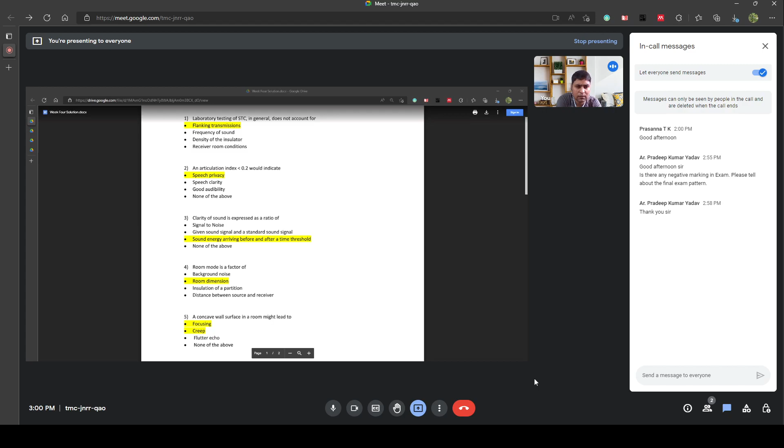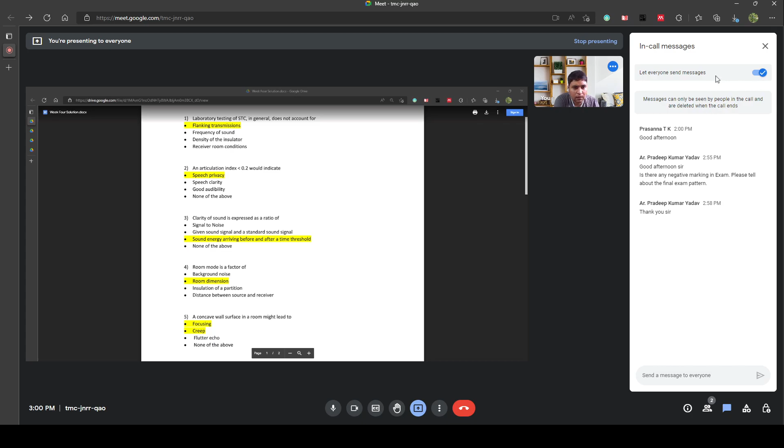And other than that, in today's session we covered again an overview of the whole subject from starting till the end. You can always refer back to the previous 4 doubt clearing sessions that have been conducted. And apart from it, there were some doubts related to the exam in terms of what is the time duration, which is standard 3 hours, and this exam will happen in online mode, as you know.

And also it will cover all the concepts of solar geometry, comfort, thermal adaptation, heat transfer, properties of opaque materials, and also glazing, shading devices, sound and sound defects, how to find reverberation time, and other concepts related to sound.

And finally, lighting, which will cover mostly daylighting concepts, the concept of luminance, luminous intensity, luminous flux, all these will be covered. And all the best for the exams.

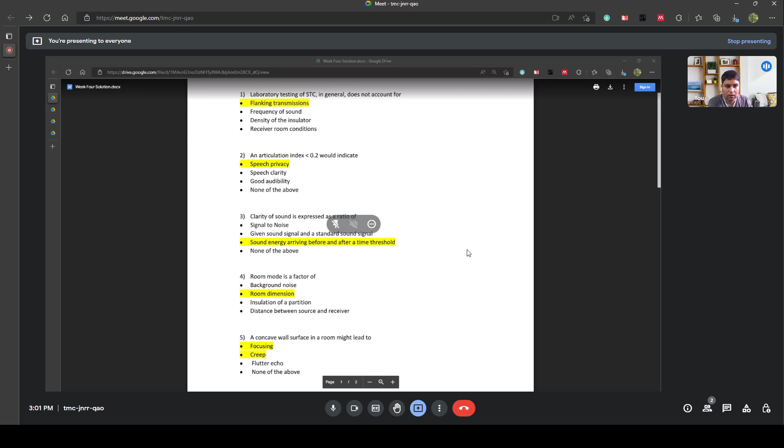Maybe I'll also share the combined presentation. I'll just give again a run through of the presentation, especially for the people who are not able to attend this revision session. In this revision session, we just look back into the whole subject.

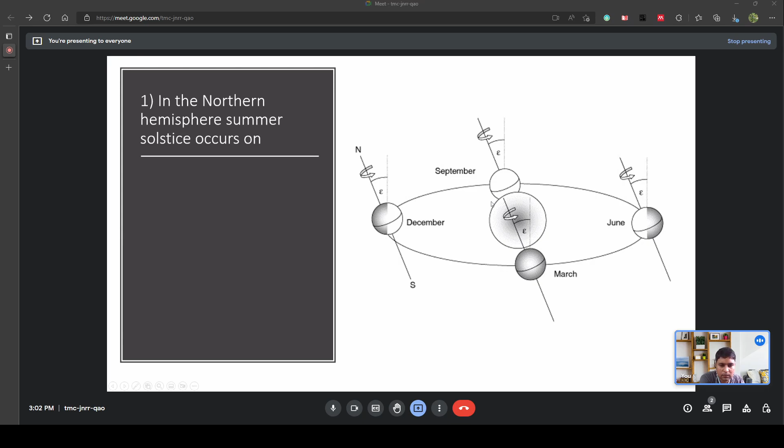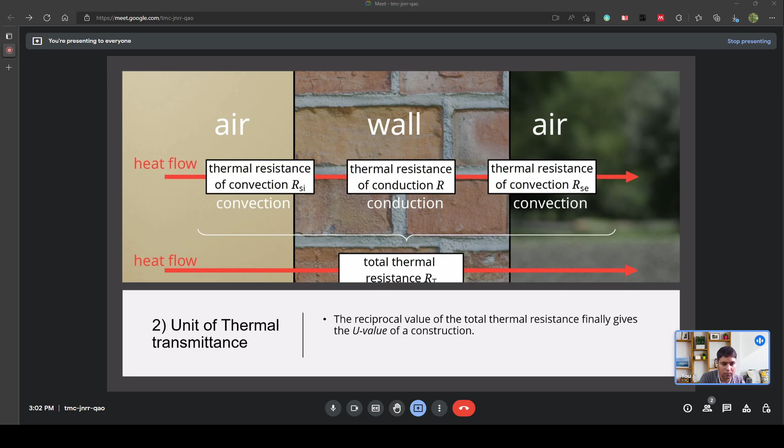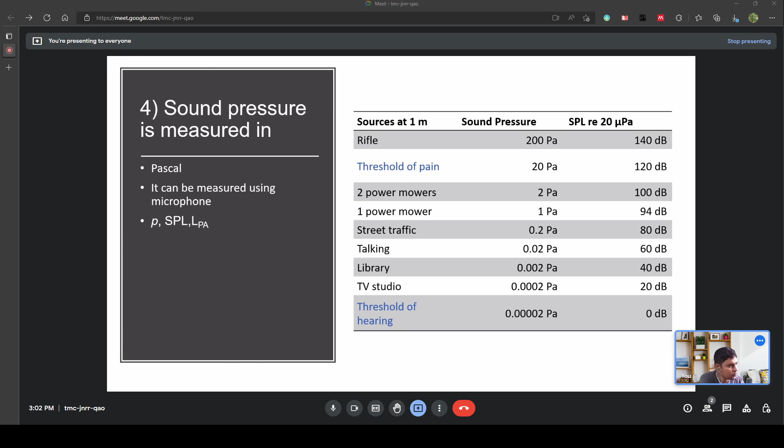Major concepts that we have looked into are the solar geometry, the heat transfer properties, how to calculate, how to solve these various problems, use the formulas that are discussed, and then try to practice a few formula related solutions. For example, this SHGC. Always look into these units. You would have come across many unit related questions also.

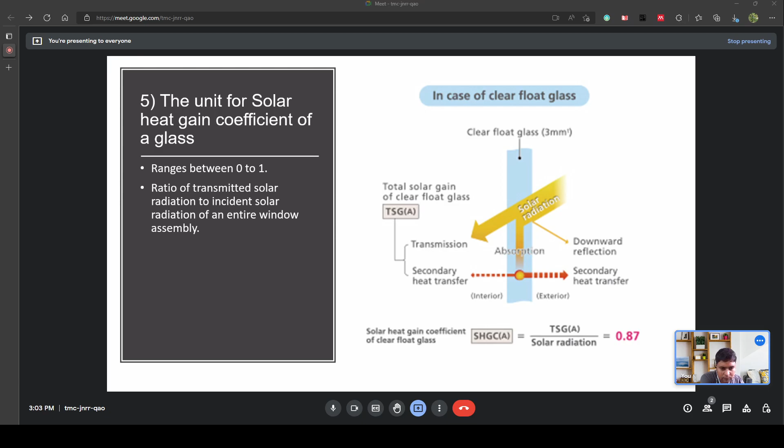Units also give an understanding of the whole concept, because based on the units you will be able to deduce all the parameters that are involved. For example, thermal transmittance unit is watt per meter square Kelvin, which is the amount of heat that is being transmitted divided by meter square Kelvin. Meter square is the cross section area involved in that property, and also the temperature. So all these parameters are involved in a particular concept.

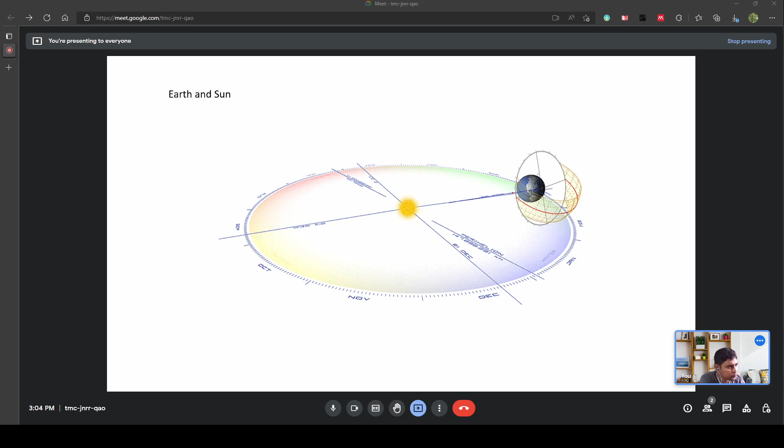And moving further, the solar geometry, as you know, the main concept is the latitude. Try to remember whether the latitude is above or below the equator, which decides when the winter or summer solstice is for the particular place. And sun path diagram we covered. In the sun path diagram we looked into the concept of altitude and azimuth angle, which are used to do stereographic projection.

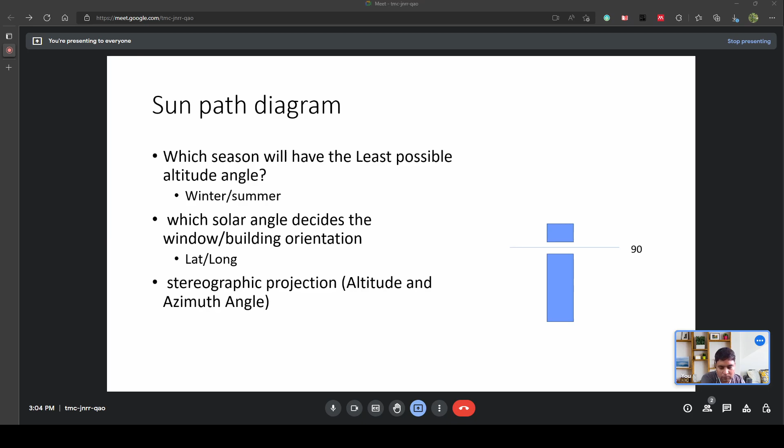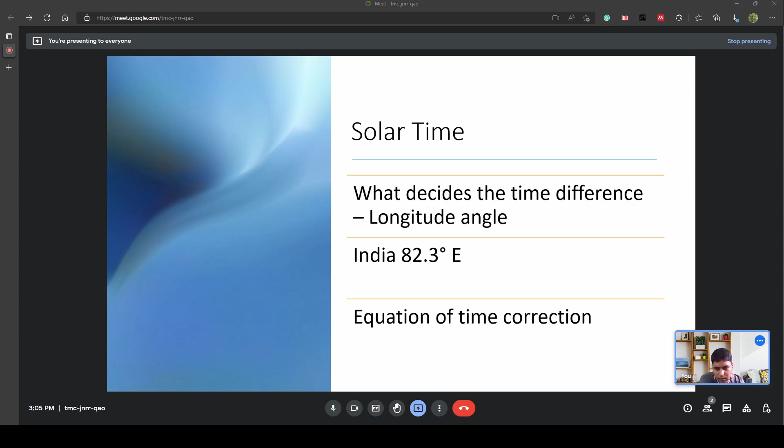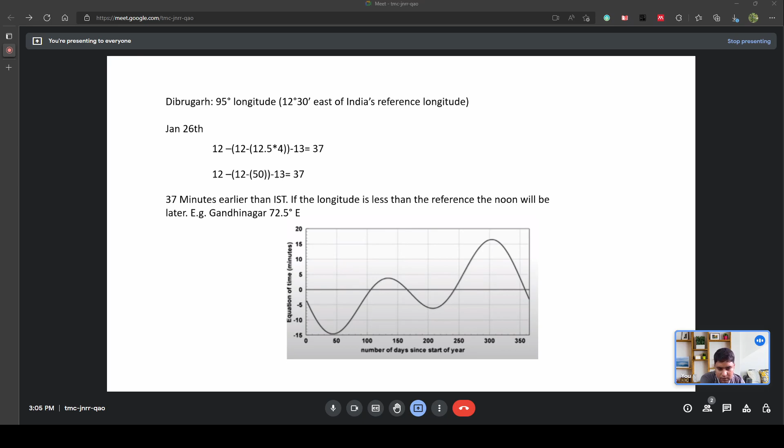We also talked about this concept of solar time, how you can use this solar time formula to calculate the exact time, how ahead or behind we are on the actual time, IST. And when we talk about solar radiation, we look into irradiance, irradiation, sol-air temperature. Sol-air temperature is an indicator of indoor temperature and depends upon the reflective property of the wall material. You might also get a question to find sol-air temperature. Look into the sol-air temperature formula.

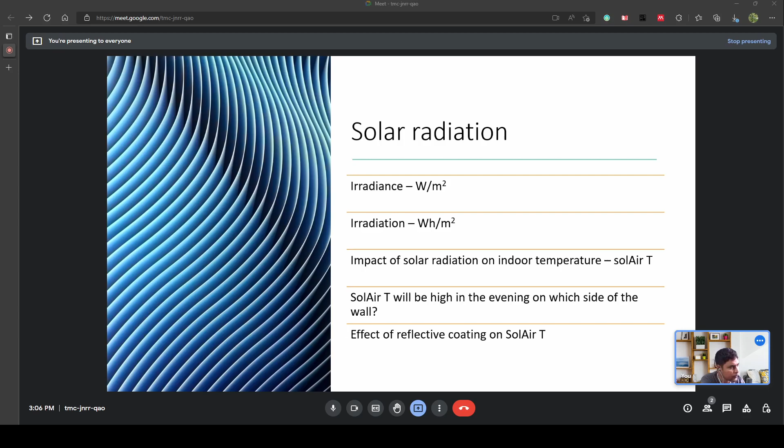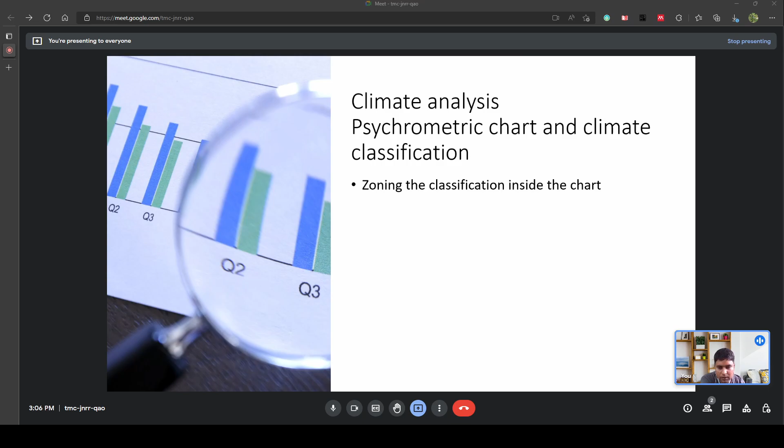Then we looked into climate classification, climate analysis, psychrometric chart, and climate classification. These are 4 different climate classifications. Köppen, which was basically used to define the vegetational landscape of the world, is followed majorly throughout the world. And conventionally, we use the National Building Code, which consists of 5 climatic zones. The climatic zones are warm and humid, hot and dry, cold, temperate, and composite.

And based on a particular climatic zone, you have climate specific, climate responsive design concepts that you can utilize to increase the thermal comfort of a particular space. For example, in warm and humid climate, we use ventilation, large perimeter to area ratio. We use sloped shading, reflective surfaces, and light walls. In hot and dry climate, we always try to shield the building from solar radiation, have a very low perimeter to area ratio. We also try to protect ourselves from wind, where we use narrow corridors between buildings.

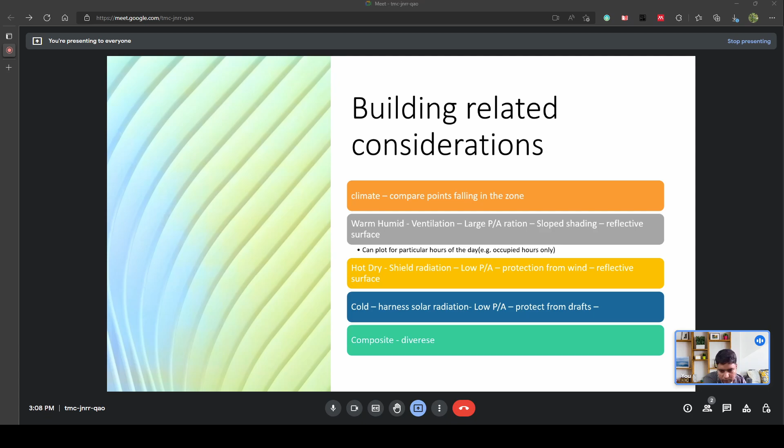Thermal comfort: we looked into the heat balance equation, the concept of thermal sensation, and various factors that are associated with thermal comfort. We have environmental, personal, and also other contributing factors. Generally, Fanger's PMV model uses only 6 parameters. That includes all these environmental parameters and 2 personal factors, which are metabolic rate and clothing.

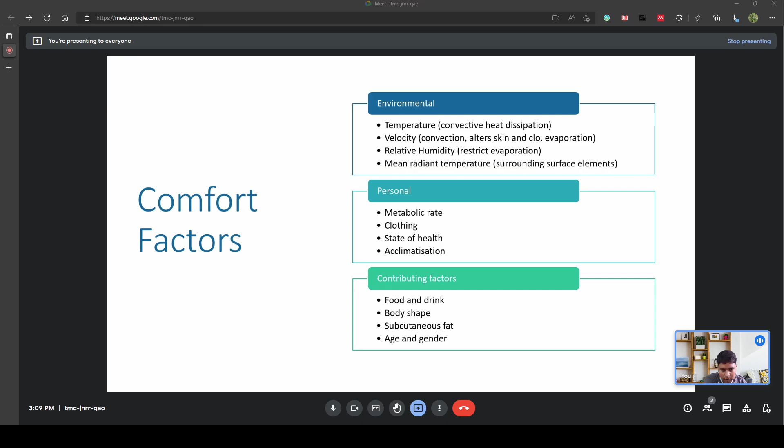And further, when we talk about environmental parameters, each parameter is measured specifically. For example, temperature is measured using dry bulb, using a thermometer. Velocity we can measure using anemometers. Relative humidity: using dry bulb temperature and wet bulb temperature, you can calculate the relative humidity. Mean radiant temperature: you use this globe thermometer, and we also measure wind velocity and temperature to calculate the mean radiant temperature using Bedford's formula.

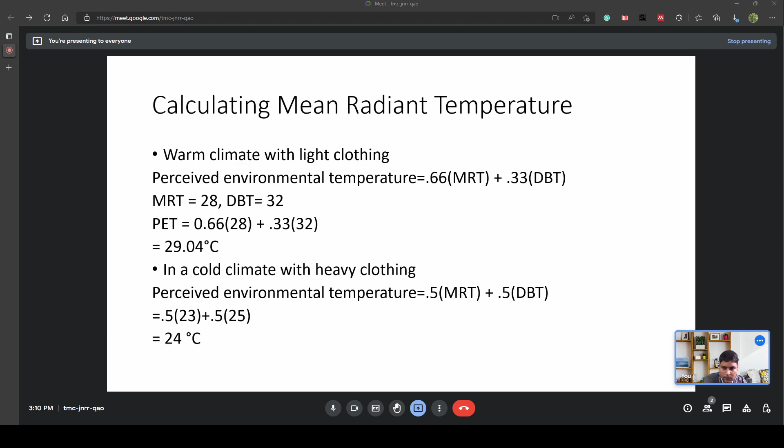When we talk about these personal parameters, one is metabolic rate. Metabolic rate is, due to the activity level of a person, the amount of heat that is being generated per meter square. 1 met is 58 watt per meter square, and the clo value is basically the thermal resistance property of the clothing that we are wearing, and 1 clo is 0.155 meter square Kelvin per watt.

And thermal adaptation concepts: before, we talked about thermal comfort, but humans try to adapt themselves to reduce the discomfort and go back to thermal comfort. And the concept of thermal comfort involves multiple parameters which are mentioned here, and thermal acceptability limits. There are various standards that give thermal comfort limits which can be utilized as benchmarks and indicators when we design buildings, but these need not be stringent.

And further, when we look into measuring thermal adaptation, we usually measure in terms of thermal sensation, thermal comfort vote, or thermal preferences. These are scales, like a 7-point scale, Bedford scale.

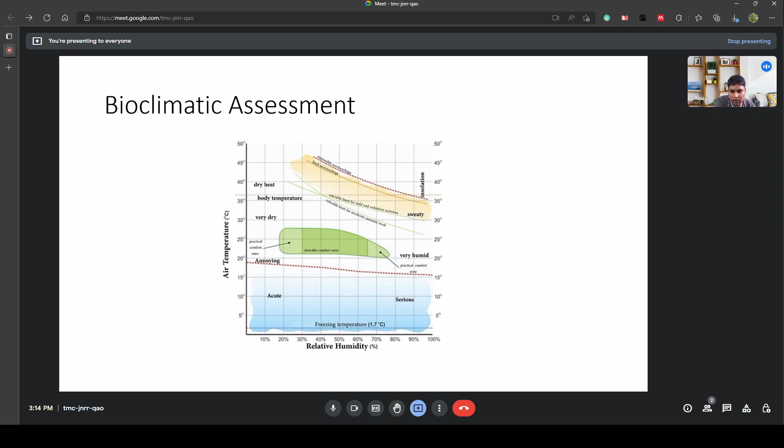And there are various assessment charts that have been developed to define the desirable thermal comfort zone, and the various strategies that can be utilized to attain that zone have also been integrated in this bioclimatic chart, where you have very high humidity ranges between 70 to 100, and this chart also shows certain indicators of what will be the tolerable limit and what will be the annoying limits also.

Further, beyond this bioclimatic chart, Givoni developed his own bioclimatic chart where, when there is a point beyond the thermal comfort zone, it shows what kind of solution can be used to go back to the thermal comfort zone. For example, if you have very humid conditions at moderate temperature, you can utilize natural ventilation.

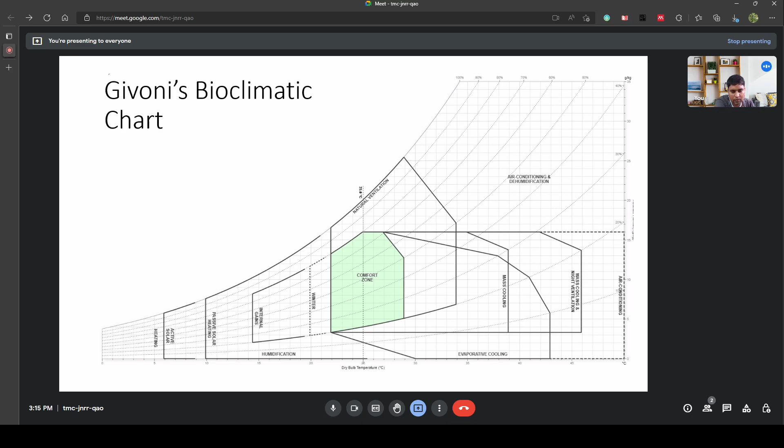At very hot conditions in drier environments, the concept of thermal mass with night ventilation can be used. But if you have hot temperatures along with very humid conditions, you have to use air conditioning along with dehumidification.

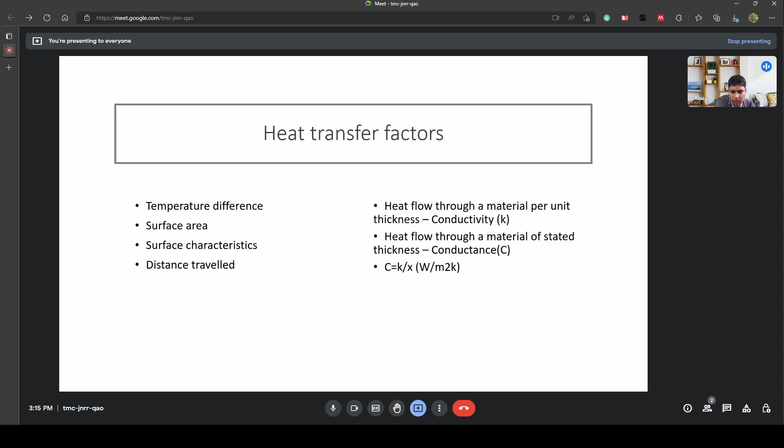And further moving upon, we talk about thermal properties of opaque materials, elements, and wall assemblies. Here,

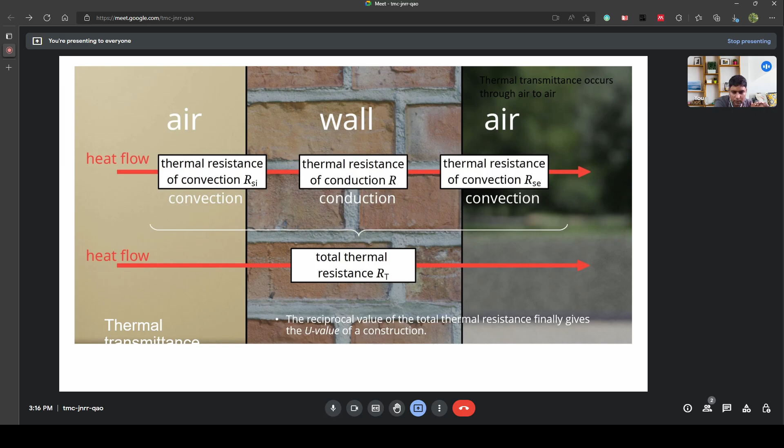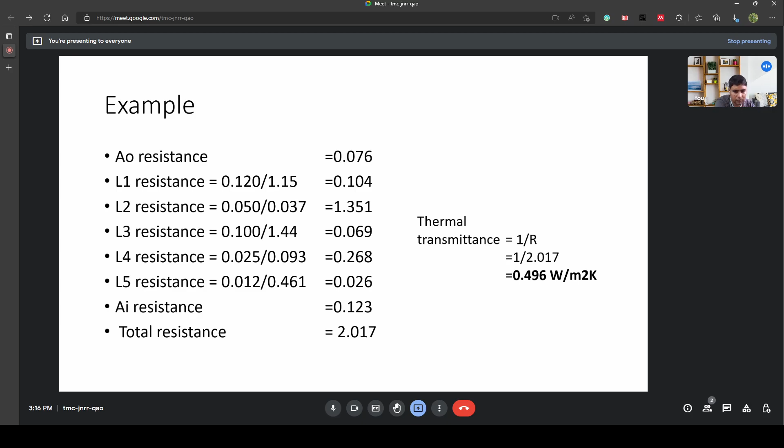If you have homogeneous wall composition, you will have one single thermal resistance for the wall. But if you have multiple layers, each layer's thermal resistance has to be calculated, and finally you calculate the U value by taking the reciprocal of the summation of all thermal resistances, and heat transfer also happens at the level of convection and radiation.

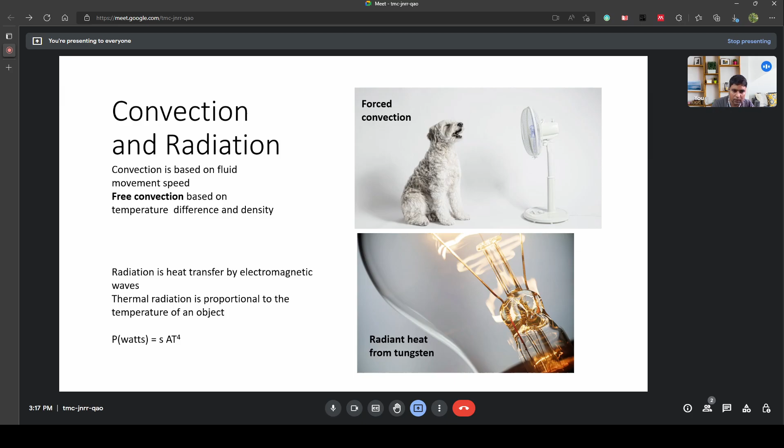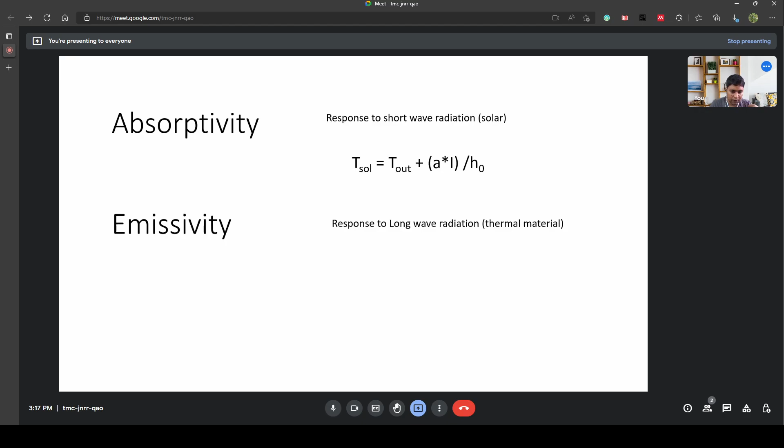And other parameters that deal with heat transfer are absorptivity and emissivity. Absorptivity deals with short wave radiation, and emissivity is the long wave radiation from thermal material. Absorptivity deals with solar radiation: solar radiation falls on the surface, and absorptivity deals with the amount of radiation that will be absorbed. Emissivity, in the other case, is the emission of long wave radiation from the material.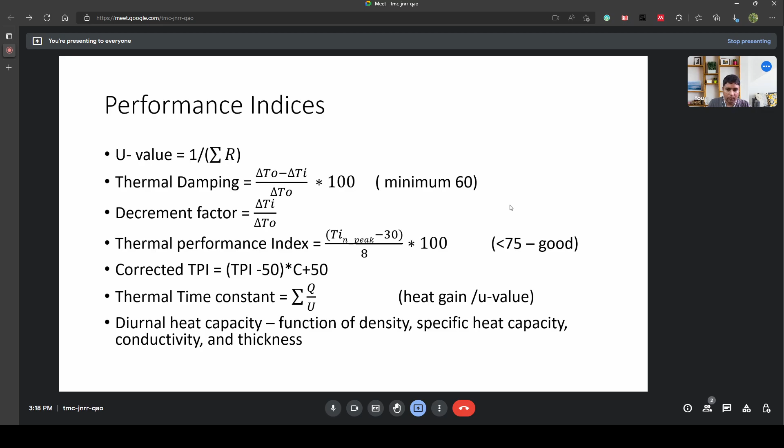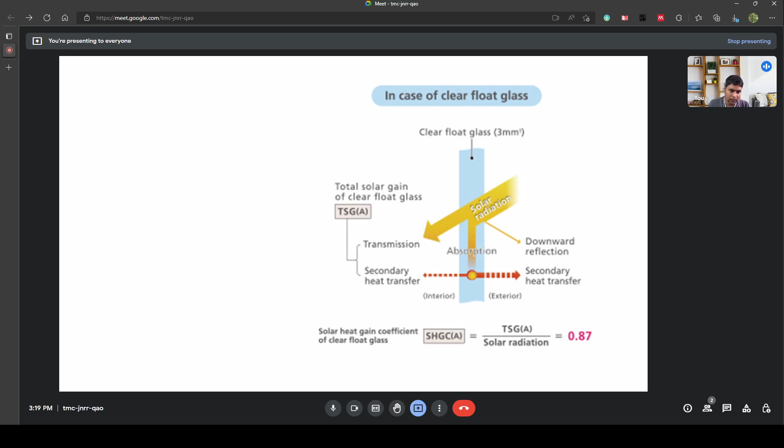Further, we looked into glazing. For glazing, the best parameter that can be used to measure the glazing system's thermal performance is the solar heat gain coefficient, which is basically the fraction of total transmitted solar gain via the glazing system divided by the incident solar radiation.

And when we talk about the glazing system, we also have to design shading devices accordingly so that we can reduce solar radiation as much as possible in hotter climates and allow solar radiation in cold climates.

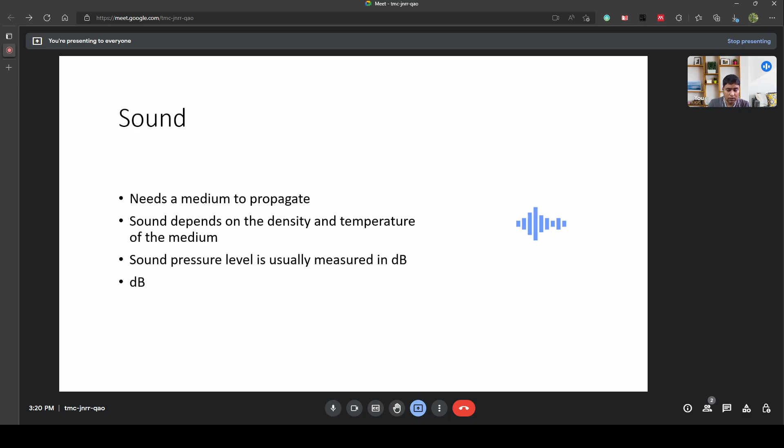Sound basically depends on the density and temperature of a medium, and sound pressure level is usually measured in decibels, though the SI unit is Pascal. There are various parameters associated with sound: sound power, sound intensity, sound pressure level, and sound exposure. And the interrelation between all these parameters is discussed when we look into these.

And sound intensity level from a distance. For example, in this case, we take an omnidirectional sound source. If the observer is at 2 meters, the sound intensity is calculated using the formula I = W / 4πr².

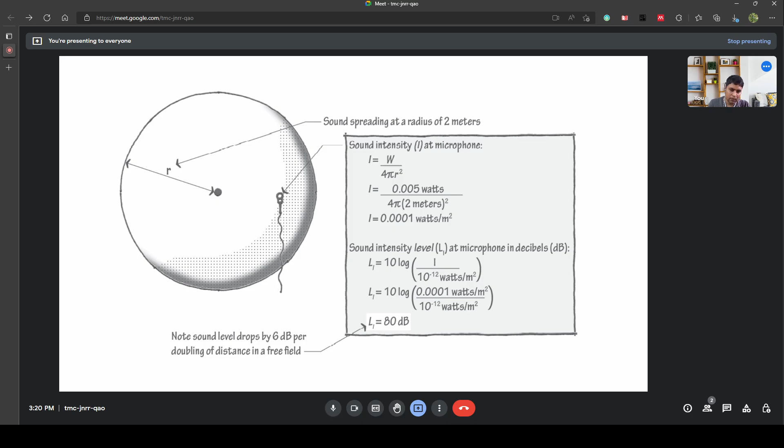When you have two similar sounds, it will result in an addition of 3 decibels. This calculation you can look into. You can calculate it, but in general, if you have two similar sound sources, you add 3 decibels. And also, if you have multiple sound sources and the difference between them is very large, you always take the highest sound source.

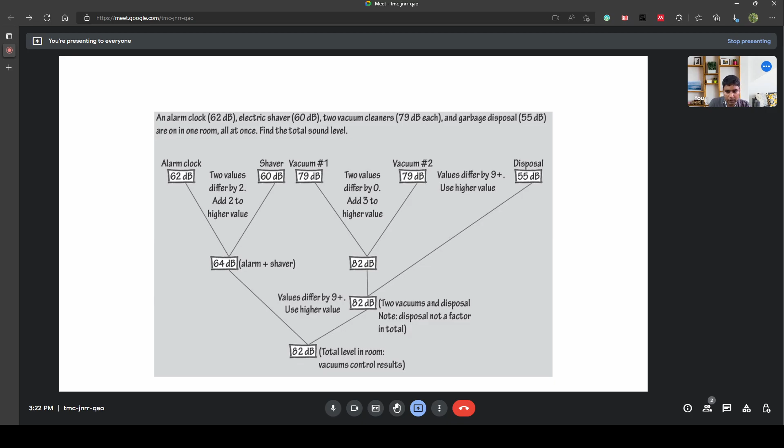But if you have two sound sources with equal sound levels, you just add 3 decibels to it, and the resultant sound level in this case is the resultant of vacuum 1 and vacuum 2, which is 82 decibels, though we have 5 different sources ranging from 55 decibels to 79 decibels.

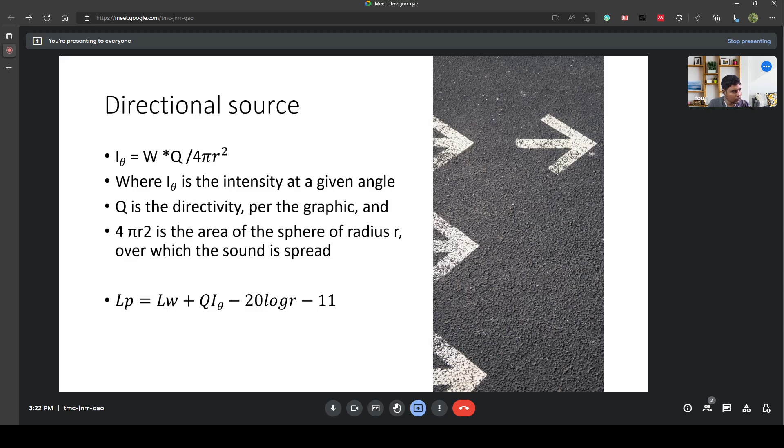Further, I am going to just skim through. Sound sources will have a specific frequency spectrum associated with them, and the sound pressure level will be different for each frequency, and the source of the noise or sound

should be taken into account first when we start designing built spaces, because when we have different frequency spectra of sound, the material properties used to design the building should also be varied accordingly, because material properties also change according to the frequency range.

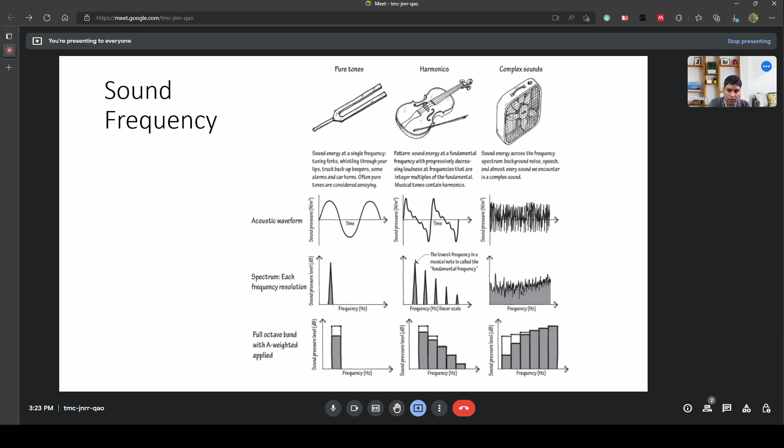Noise criteria is the maximum allowable noise in a given space, taking into account the spectrum of sound frequency also. What else? Reverberation time. This is the time required for reflections of direct sound to decay by 60 decibels, and it depends.

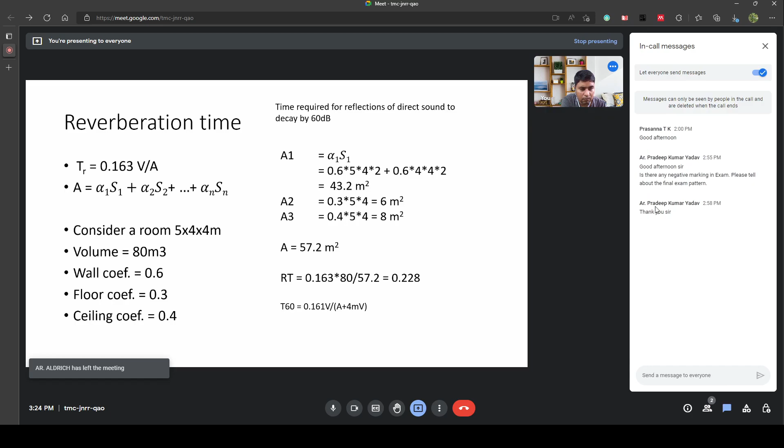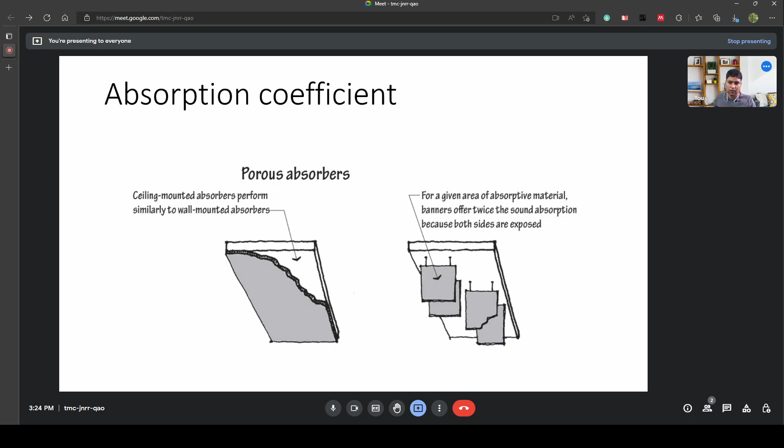As we spoke previously, materials have an absorption coefficient associated with specific sound frequency, and this chart shows the noise reduction coefficient, overall noise reduction coefficient, and also sound absorption coefficient for different frequency ranges. You can see, for example, if you have a concrete block, it has a noise reduction coefficient of 0.05,

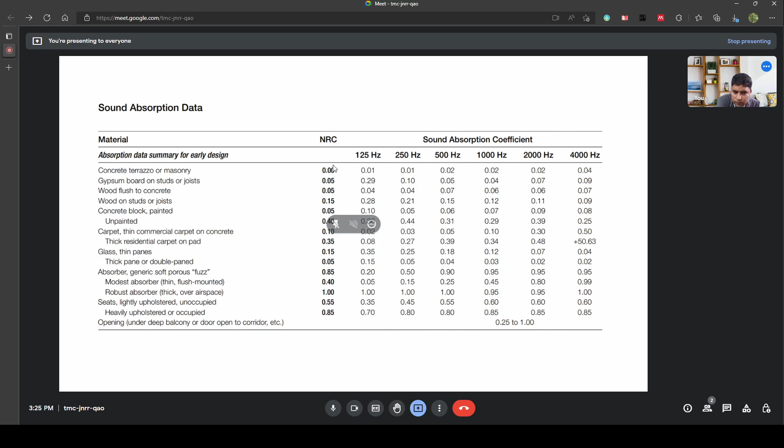and heavily upholstered or occupied space with, like, seats. Actually, furniture also plays a role in sound absorption. Here it has been indicated. Sound propagation, this we touched upon earlier.

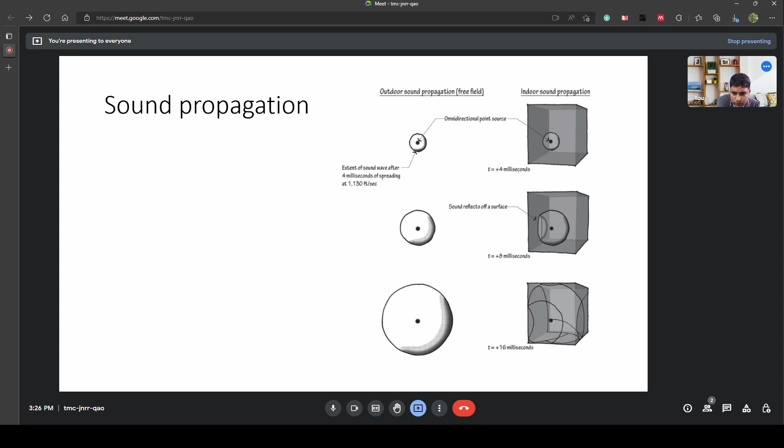Another concept was speech intelligibility, and we use speech transmission index or rapid speech transmission index majorly, where the value of 0 indicates completely unintelligible, which indicates it is fully confidential. And if we have an STI index of 1, it means perfectly intelligible, but the space will have no privacy at all.

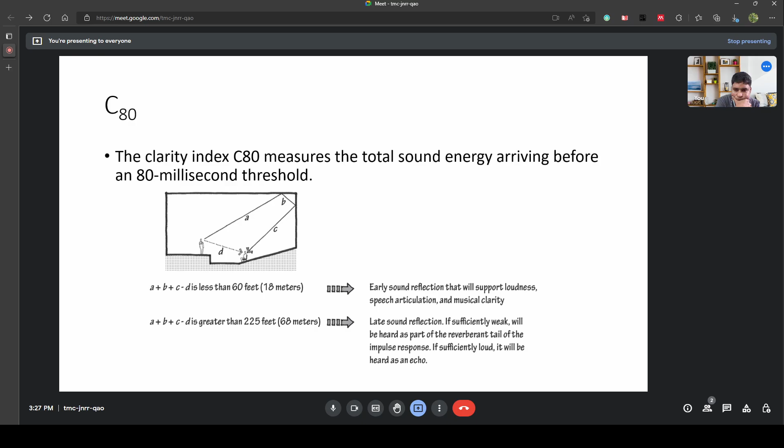Further moving on, when you look into sound defects, the major defects are echo, flutter echo, focusing, and creeping. Echo is when the sound path and the sound surfaces arrive late, and it kind of interferes with the direct sound. And in flutter echoes, we have long paths between smooth parallel surfaces. Sound returns a small echo each time a reflection passes.

Focusing sound, if we have this concave design, is basically kind of a nightmare in acoustics, where at a particular point you have all the reflected sounds coming and creating an echo. And sound creep is multiple reflections simultaneously arriving at a listener location. And we also have multiple remedies that can be done in terms of design to neglect these defects.

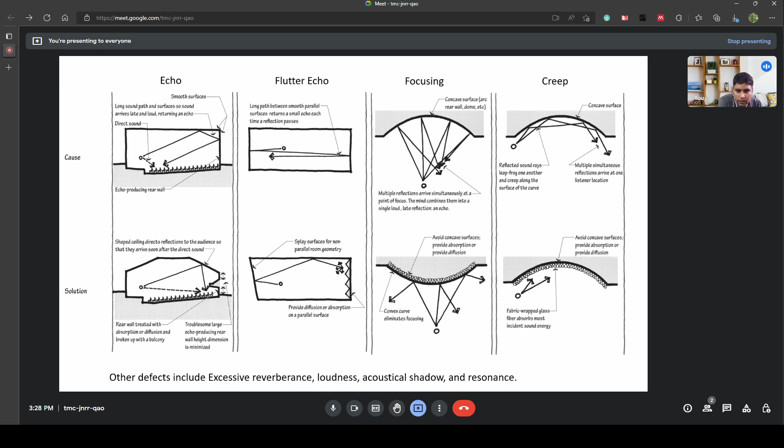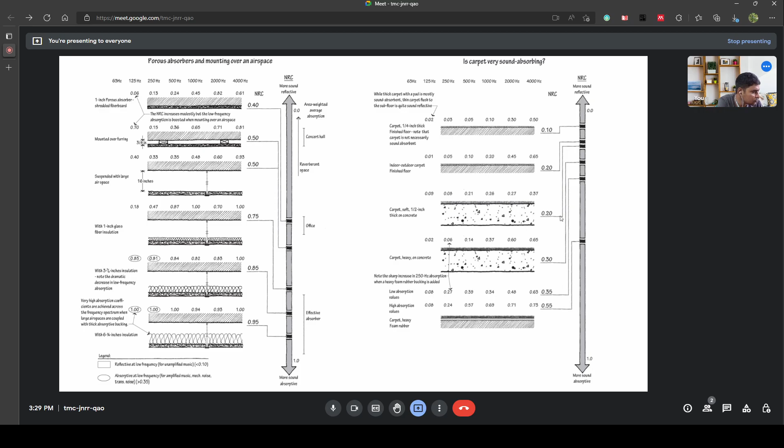These are various configurations of building materials and the associated NRC values. Here you have a carpeted concrete floor which has a noise reduction coefficient of 0.2. When you increase the carpet thickness, the noise reduction coefficient increases to 0.55.

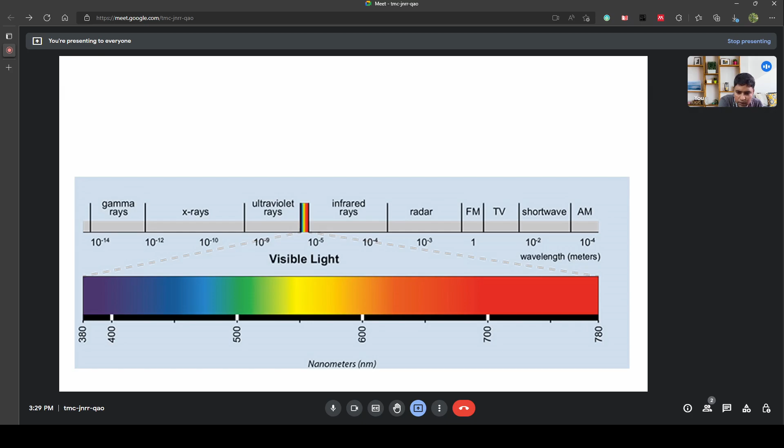Further, the final stage of the subject covers lighting. Visible light is within the spectrum of 380 to 780 nanometers. When you talk about a light source, luminous flux is the amount of light that is emitted by a light source. It is measured in lumens, and the specific light flux emitted by a light source in a particular direction per solid angle is called luminous intensity.

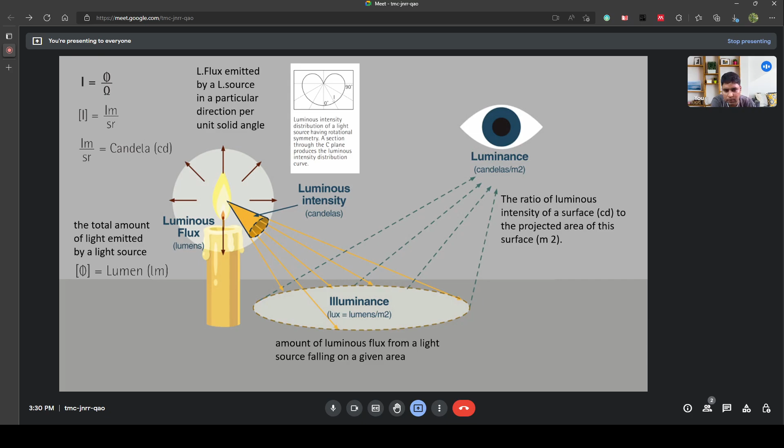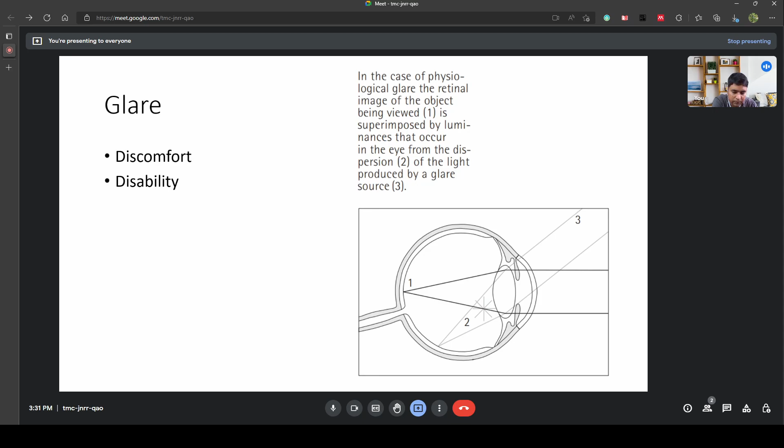Illuminance is the amount of luminous flux from a light source falling on a given surface, which is measured in lux, and lux is basically lumens per meter square, and luminance is the ratio of the luminous intensity of a surface to the projected area of the surface. It is measured in candelas per meter square. Glare: there are two glare concepts, discomfort and disability glare, and the concept of diffusion can be used to reduce sharp shadows.

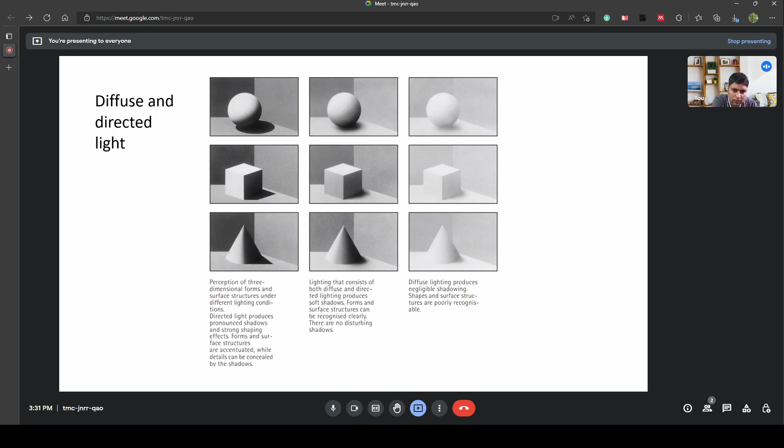Further, we look into color rendering index. A color rendering index of 100 indicates that it has the full visible spectrum emitted by daylight, and these rendering indexes are used in artificial lighting, whether a particular lighting device has full color rendering, like how much color rendering index it covers. Another concept is color temperature. It indicates whether the light source is warm or cool.

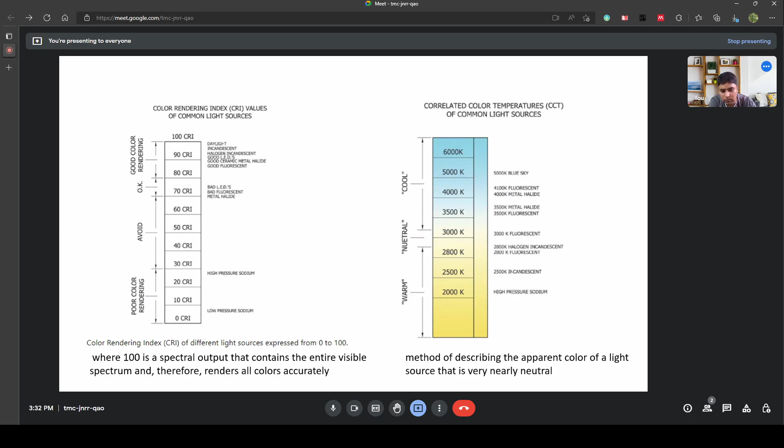Further, when you look into the concept of daylighting, daylight factor is the ratio of the illumination inside the space compared to the outdoor illumination. We also look into the concept of daylight autonomy, which is the percentage of annual daytime hours that a given point in space is above a specific illumination level. Here you have a certain value x, and for example, for office space we consider 300 lux.

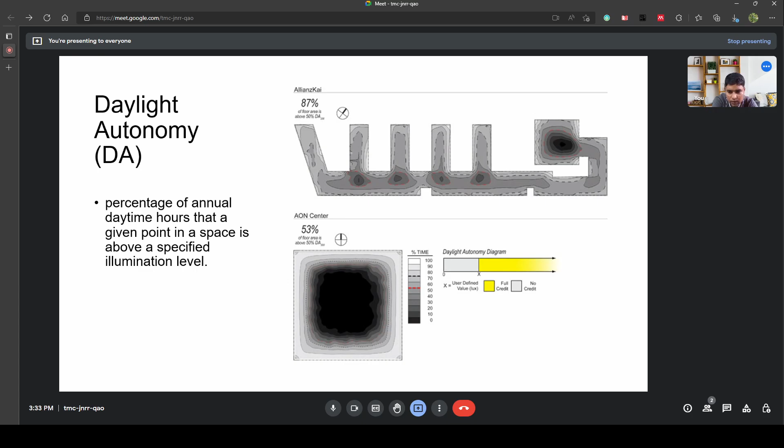So daylight autonomy is basically the percentage of annual daytime hours that a given point in a space is above the 300 lux level, and useful daylight illuminance is basically, instead of having one single threshold, a band, in this example ranging from 100 lux to 2000 lux.